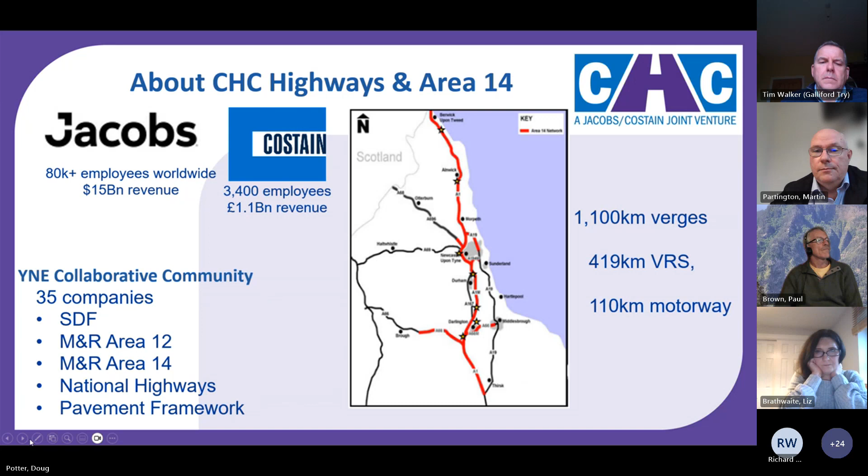My slides are a bit, what do you call it? Heavy, I suppose. So I've tried to make this specific to about 3 different types of design for maintenance issues that we're currently experiencing, and I'm looking at it from different angles. So

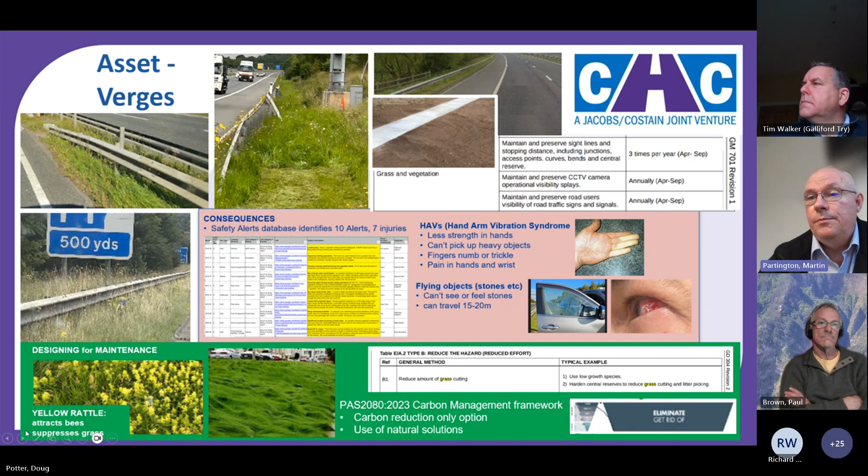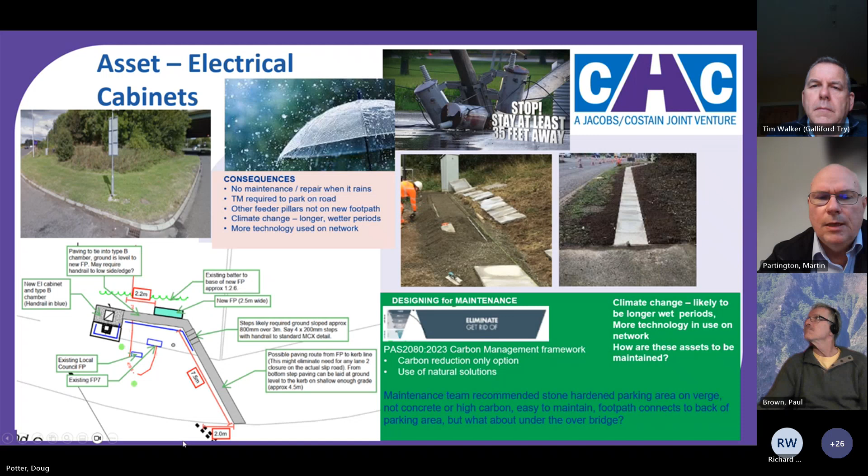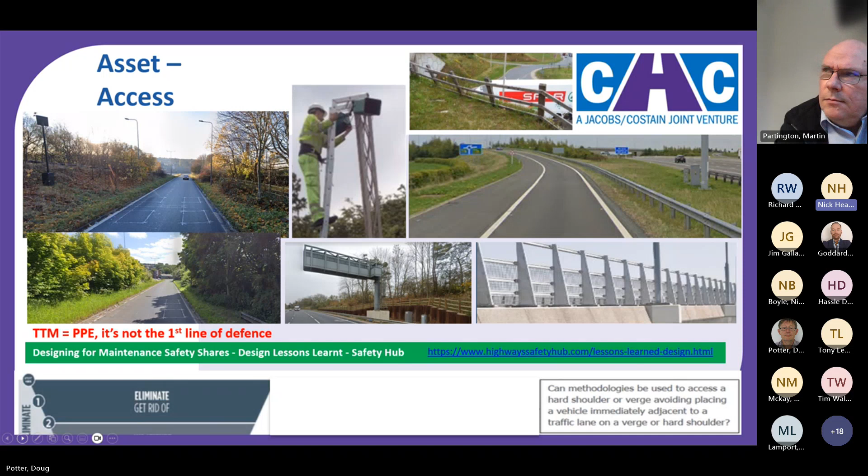We have meetings with DFT now, and there's a recognised history of challenges that are presented to these big transportation highway schemes, and the aim is to change the way we engage with utilities. But in terms of a regulatory stick, no, there's very little, which is why we have to really push a more collaborative environment.

Just out of curiosity, at what stage are you doing these designs? Is this a detailed design? So if it's PCF major projects, it'd be detailed design stage 4, stage 5? The design fix D and E, yes. Stage 4 going to 5. Okay. Stage 6 will be to build.

So what about if we did this? Ask these questions earlier in stages, in concept, and have those discussions in concept, so that when they come to do their detailed design, they're already aware of what we're looking at as a big picture. Yes, I agree. I do appreciate that some utility companies don't always have the right attitude, and certainly the comms companies, their designers are not like some of ours. And they're certainly not digitally aware.

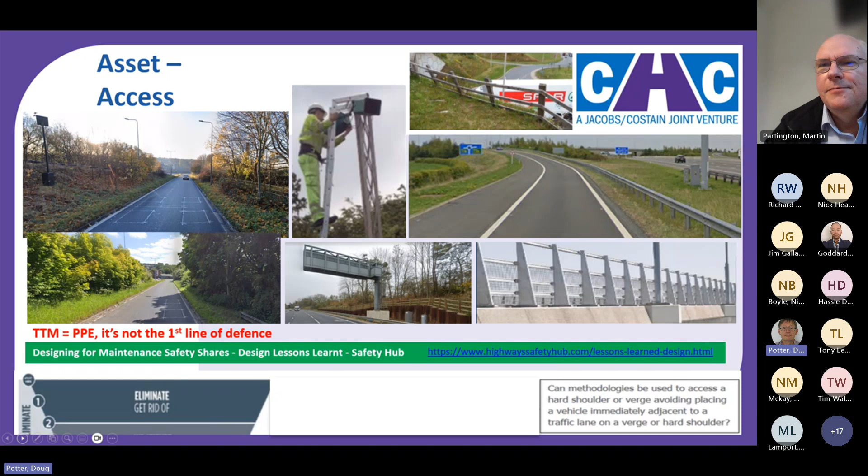Hassle, maybe you'd like to take this offline. You've got each other's contact details in the invite. Yep, let's do that. Because I'm conscious of time, because Doug's going to tell me off. Thank you, Martin, because Doug's on next and gets quite precious about his 10 minutes. Thank you, Richard, and good afternoon, everybody. Martin, if I could just ask if you wouldn't mind going off camera, because my Teams is playing up. Sorry, I don't want to freeze. I'll share my screen. So hopefully that will come through.

So I'm going to give a quick update on the future of RTB 26 Safety by Design, alignment with the Supply Chain Safety Leadership Group significant risk exercise, improving design risk management, and looking at how we can form a design risk management standardization task and finish group to look at those issues currently.

A quick recap on safety by design, as I say, subject to future review by the Supply Chain Safety Leadership Group, and I must admit I'm not fully up to speed on the context of that, and we need more discussion with supply chain. So RTB 26 was last updated in September 21, and Paul Brown has done a lot of great work there. I see Paul's on the call. I've tried to touch base with Paul in the week, but haven't been able to get in touch with him.

So the key objectives of RTB 26: to drive a safety by design mindset from the outset, to capture and share information throughout the project lifecycle, as set out in PAS 1192 Part 6. To promote off-site manufacture and assembly, so design for manufacture and assembly being hopefully the default construction assumption. To foster virtual rehearsals as business as usual, with ensuing insights informing our design development.

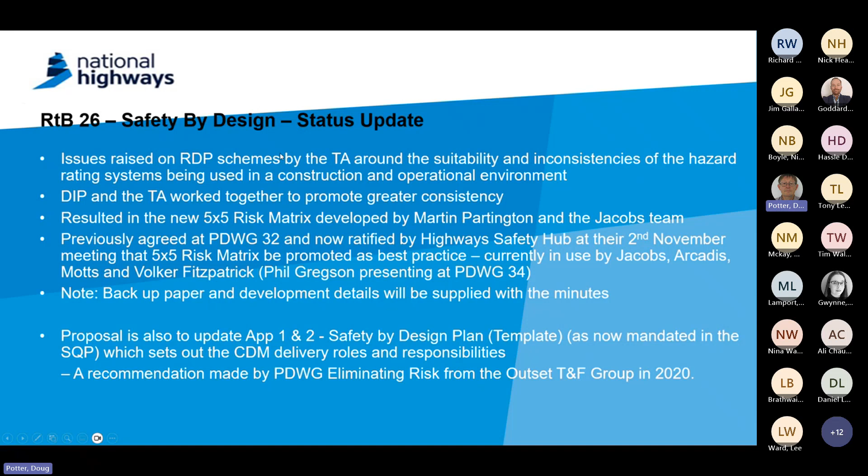There has also been a proposal to update Appendix 1 and 2, which is the Safety by Design plan. So there is a template which is now mandated in the supply quality plan, and that sets out the CDM delivery roles and responsibilities. And this was a recommendation that came out of the PD Working Group Eliminating Risk from the Outset Task and Finish Group back in 2020. And again, Paul has done some great work there in consultation with others to develop a template. And the aspiration was to get that into an updated version of the RTB.

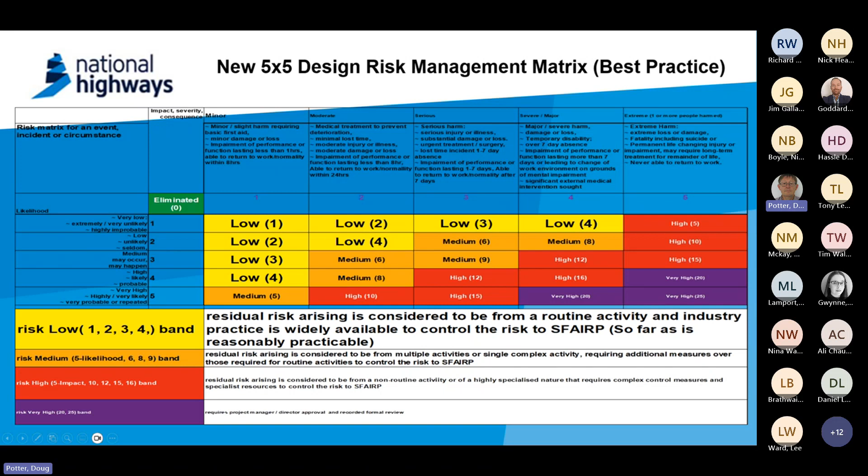So there's the new matrix, the new design risk management matrix. So a lot of work's gone into that. As you can see, the banding, low, medium, high, and very high, improved descriptions in terms of severity, and also the scope to demonstrate where the risk has been eliminated. So I won't go into any greater detail there, but from a risk management perspective and objectives for the task and finish group, just jotting down some thoughts here.

So we're flagging up that there is a need for greater standardization. So if we're looking at construction, ensuring designers identify, capture and mitigate both health hazards and safety hazards, because health is extremely important here, and these issues need to be flagged up, and often health is forgotten in the process. We need to provide designers with a greater understanding of likelihood and severity to drive that consistency. We need to ensure that we're considering buildability. We need to drive greater consistency of hazard rating for residual hazards, which we hand to the principal contractor.

And we also need to ensure there's greater emphasis on the significant, unusual and difficult to manage hazards. We don't want to be inundating drawings, BIM model, etc., with thousands of hazards and lose those unusual, as it says there, difficult to manage. If a competent contractor understands the hazards, we as designers still need to review those and try and minimise those, but we don't want those to cloud the bigger picture.

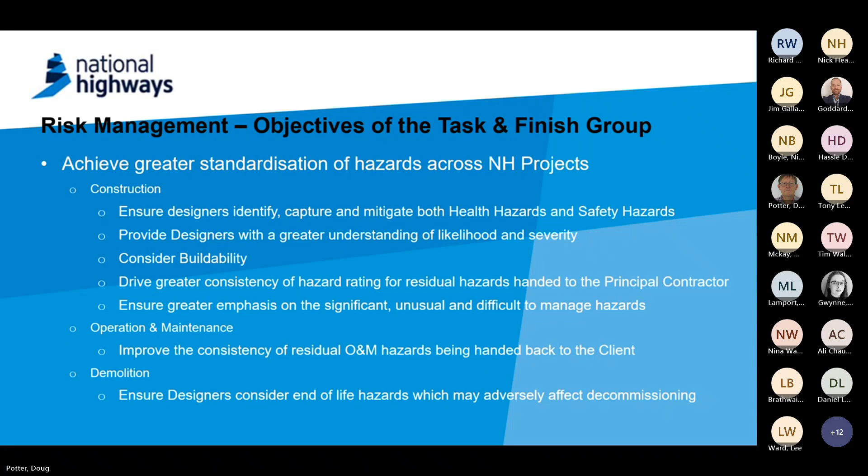And from an operational and maintenance perspective, we need to be looking to improve the consistency of those residual O&M hazards that are being handed back to the client and the maintainer ultimately. And then at end of life, from a demolition perspective, we also need to ensure that designers are considering those adverse effects at decommissioning stage. So moving on to the next slide.

So I've just taken this. This is actually a RAG list that was generated by the Construction Industry Advisory Committee, CONIAC, back in 2015. I've abstracted those that are more highways related, but it's a typical RAG list, and there are similar amber and green lists that were provided. And I suppose the ask is, how does this align with the aspirations of the supply chain with their significant risk exercise?

Can the CONIAC RAG list be updated? I'm sure that we as different organisations have got our own RAG lists, and I know various RAG lists have been published over the years. Can we pull those together to create a more unified set of guidance?

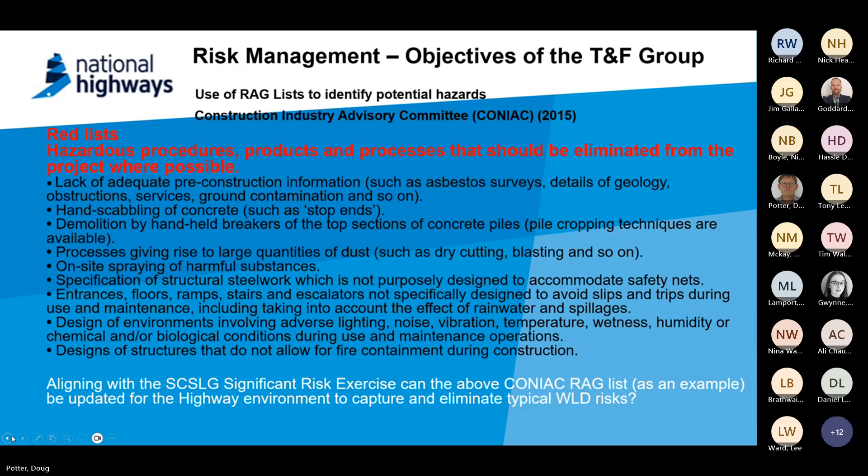Okay. So as you can see, from client input, it goes through the various stages into concept, into control points, and detailed design, and how residual risks should be managed through that process. I won't go into detail there, but this is part of the work that's coming out of the BIM for Health and Safety working group that HSE are promoting at the moment. So moving on, yes, there we go.

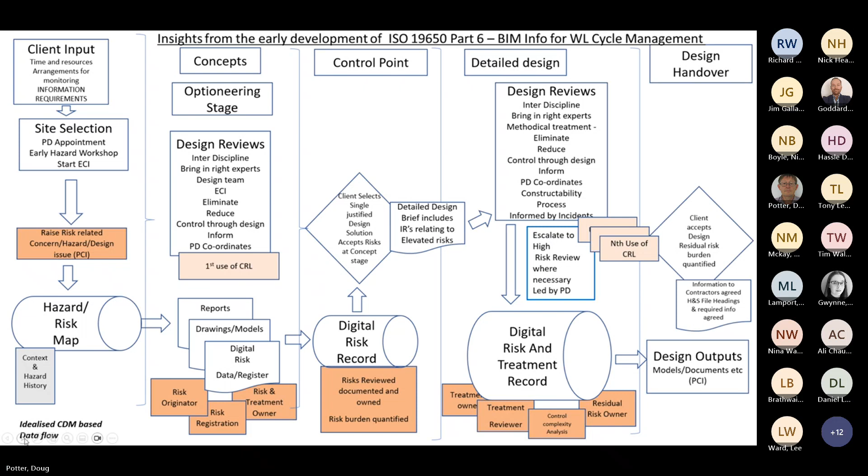And I must admit, I'm not wholly clear on the aspirations from supply chain, as I said at the start, and how this is going to move forward, and particularly integrate with health as well as a future RTB. There's also quite a lot of work that's gone on in terms of Uniclass and what the implications for risk management there.

There's also quite a bit of work that's going on on our mega projects, so the A66 and LTC, where they're working effectively across portfolios of projects and schemes, and to drive consistency across those projects and schemes. So there's work that we can engage there, and there are obviously representatives from those schemes who are members of Principal Designers Working Group.

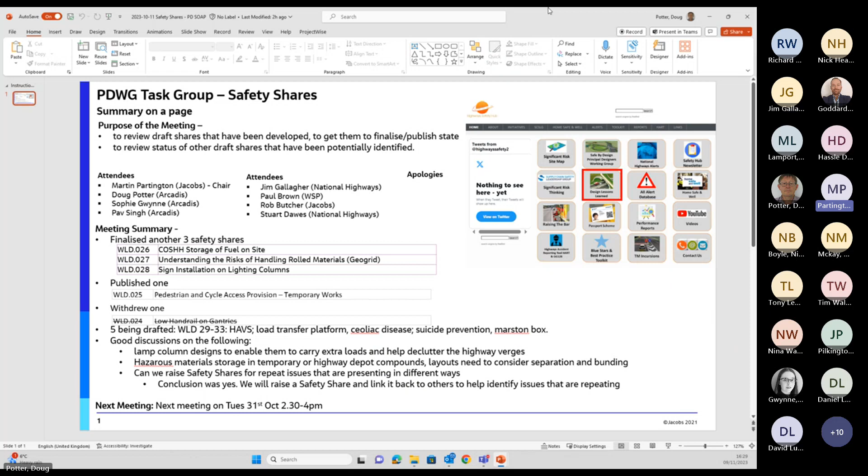Okay. So safety shares that we've been doing. We've reviewed 3 and finalised 3. We've dropped 1, which was to do with the low handrails on gantries, because there's already a standard out there that's looking at that. And there was quite a bit of discussion around raising shares again on subjects that have already been raised, and we've agreed to continue doing that.

So it's similar to what you would get with the safety alert. So you may get repeat safety shares coming through, but we'll link them back to existing ones that have already been identified. But those are potential areas where designers need to be focusing, because you're getting repeated incidents coming through. There are more shares coming through, and after doing that designing for maintenance presentation earlier, there's quite a few bits and pieces in there that I think should be coming through on the safety share side as well.

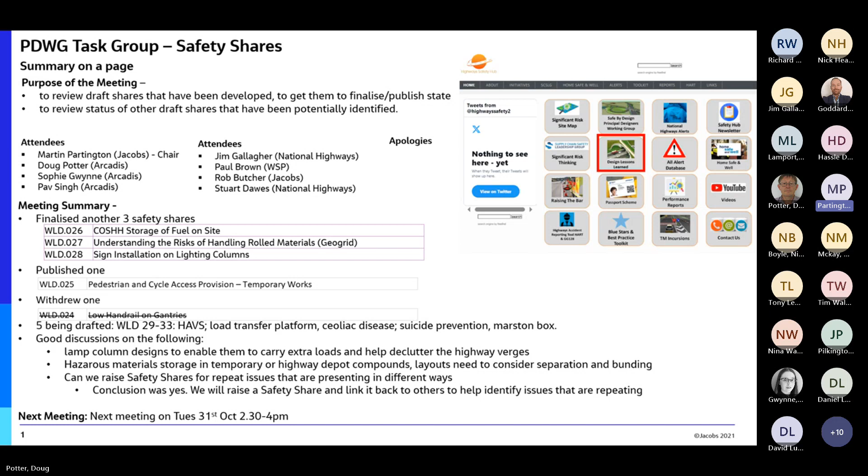But yeah, that's where we are at the moment. There's still a good group there, but if anyone's interested in getting involved, then please put your name down and we'll include you in. Okay, thank you, Martin.